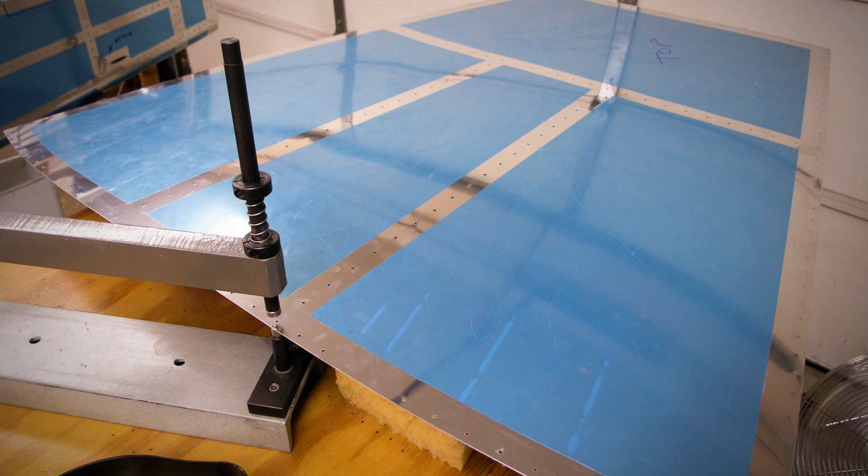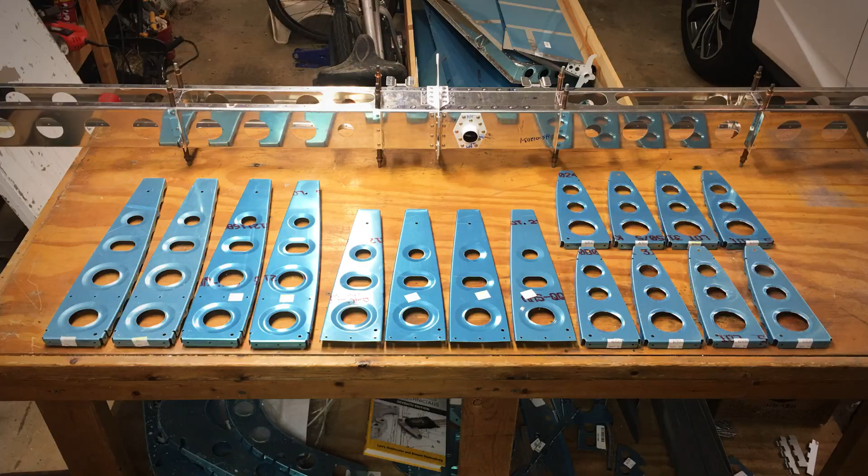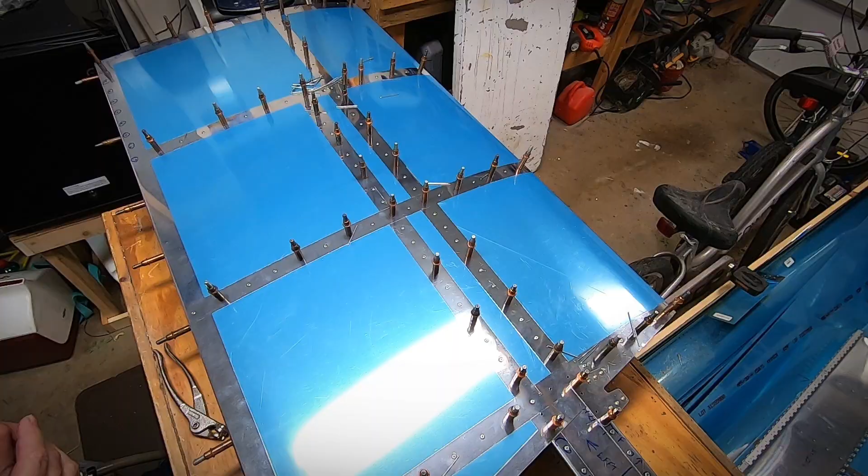Before I get into the last video in the RV-12iS Stabilator construction series, I wanted you to see something that will surely motivate you to build your own aircraft or complete the one you've already started. At McKinney High School in McKinney, Texas, there is a special group of students that are members of the McKinney Aviation Academy. This group enables students to study the history of aviation, careers in aviation, build and fly model aircraft, attend air shows, earn their student pilot license, and work on actual aircraft, discovering the many options available in the aviation industry. Here's one of their latest projects, a Vans RV-12iS.

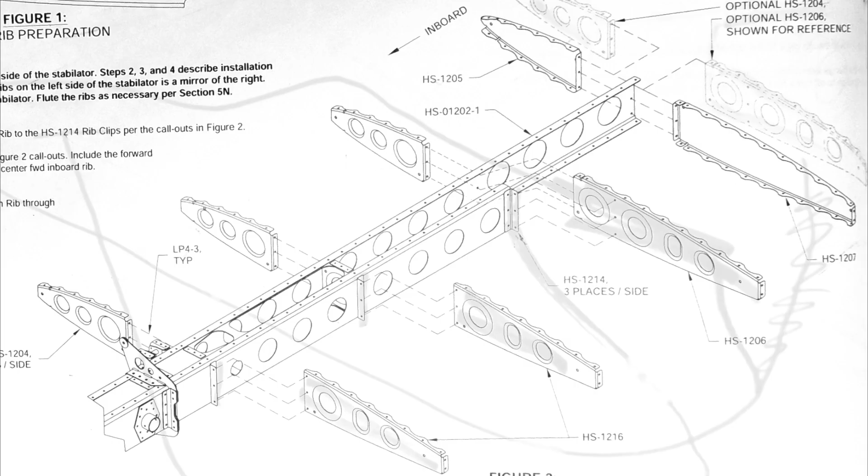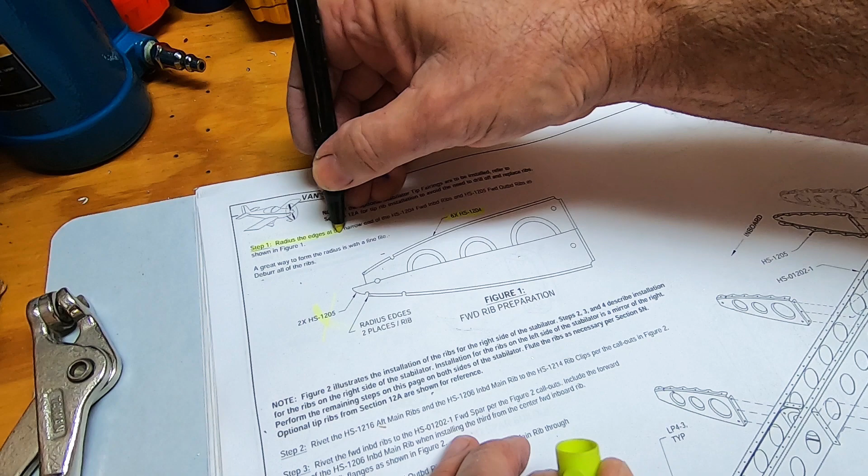Time for ribs. First thing to do is to radius the leading edges of the forward ribs. Most likely this is done to prevent the square edge of the rib from pushing too hard on the outer skin, causing an outward dent. Since this is such light material, the Scotch-Brite wheel seems to do the trick.

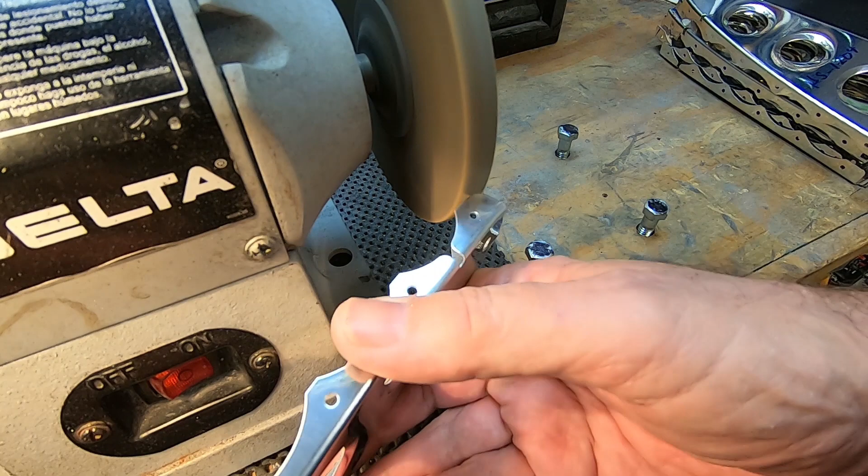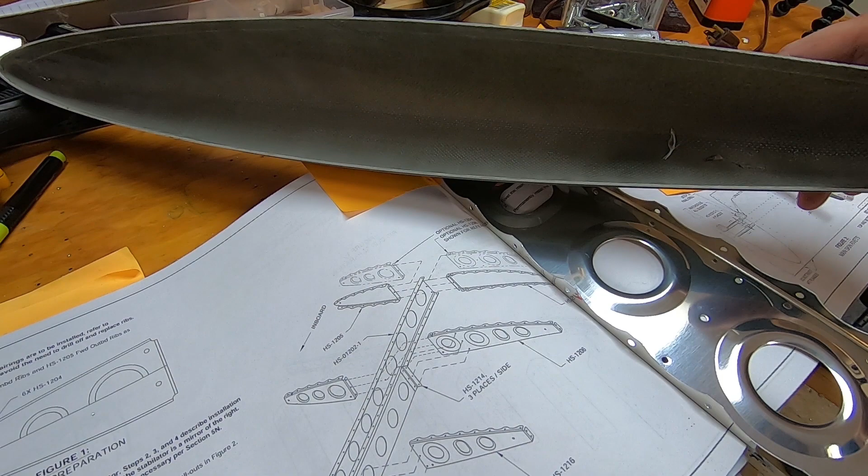All radius is done and the edges of the ribs sanded. Since I have opted to attach the optional fiberglass tips, I will need to discard the end ribs that have a solid interior and use the ribs with the lightning holes. This allows for the attachment of the fiberglass tips. When the ribs are pressed at the factory, it causes a slight warp in the rib. The fluting tool puts a small crimp in the rib edges to force the rib into a straight alignment.

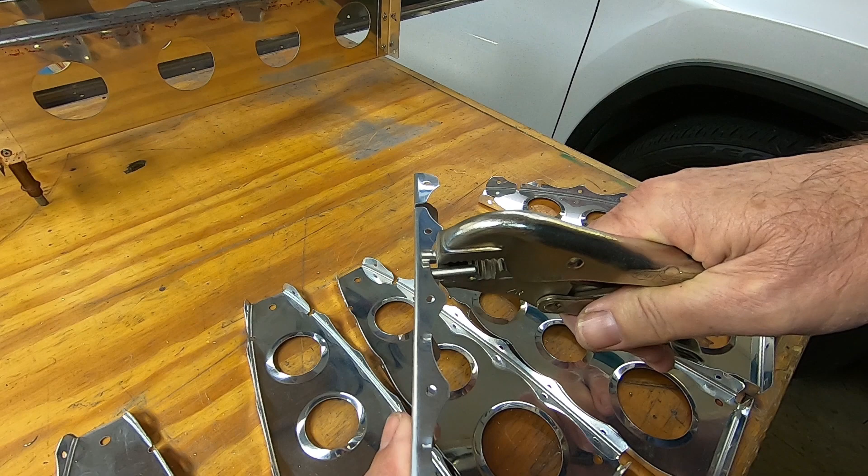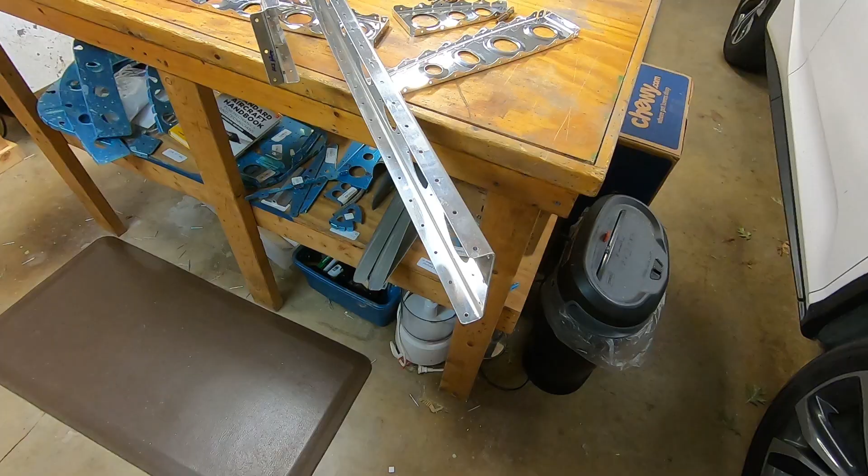Now to cleco all the ribs to the main spar.

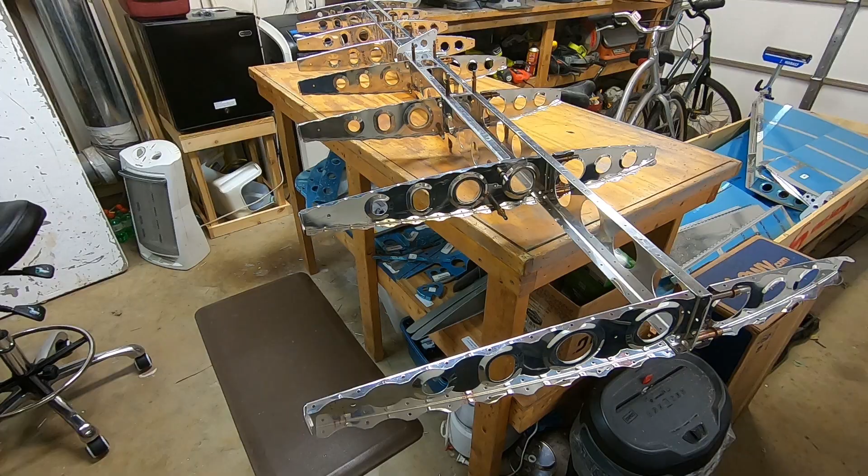All the ribs have been clecoed to the spar. Now it's time for pop riveting.

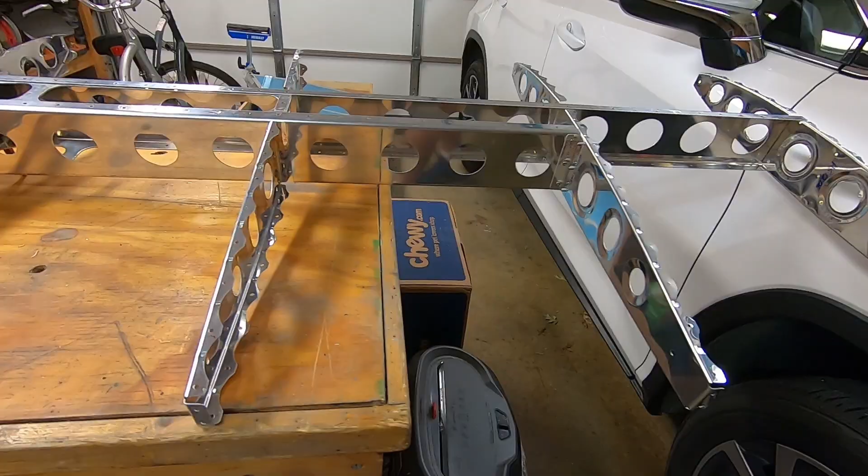There we go, all the ribs are in place. Now it's time for the skins. Okay, I've got the skins on, top and bottom.

It said to put in like 1/3 of the Clecos, which is a good thing because I ran out.

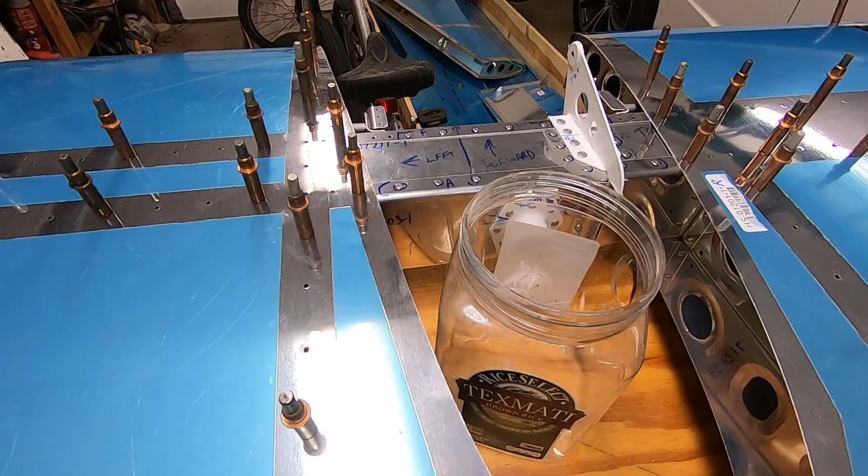Great, someone's at the door. Okay dog, I'm coming. A package from Pennsylvania.

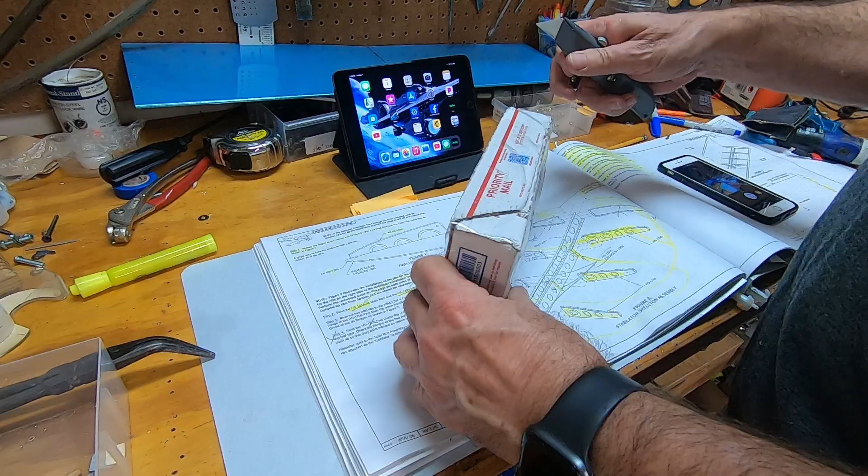Wow, somebody likes tape. Lots of tape.

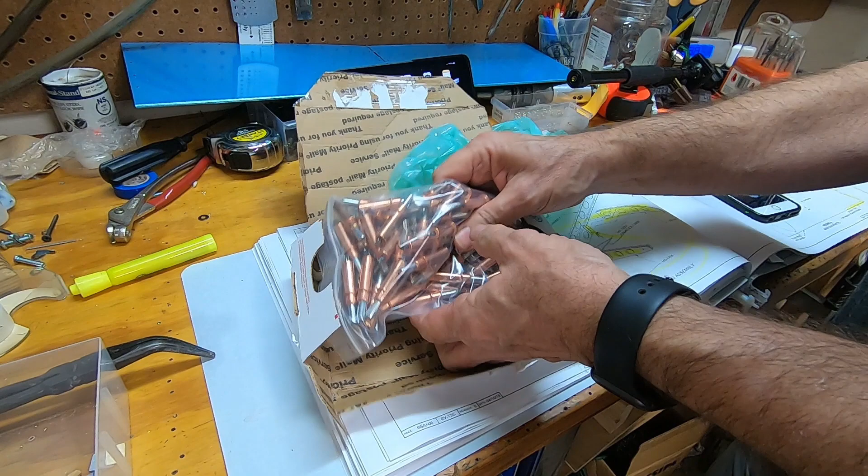Oh cool, 1/8 inch Clecos, just in time.

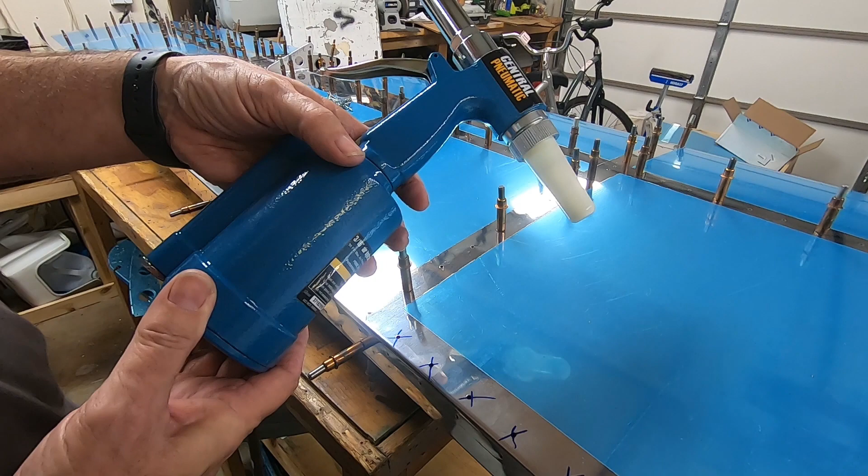Now it's time to pop rivet the top and bottom skins to the frame. This is my pop rivet gun. Got it at Harbor Freight for like $65. It's great, really works good.

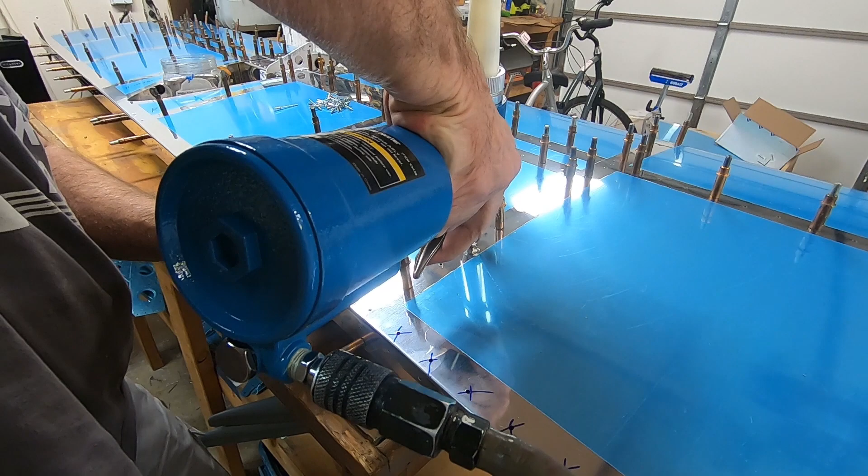The only thing I've noticed is that when you pop a rivet, the mandrel sometimes sticks. But if you take it and turn it this way, it falls through, which is pretty cool.

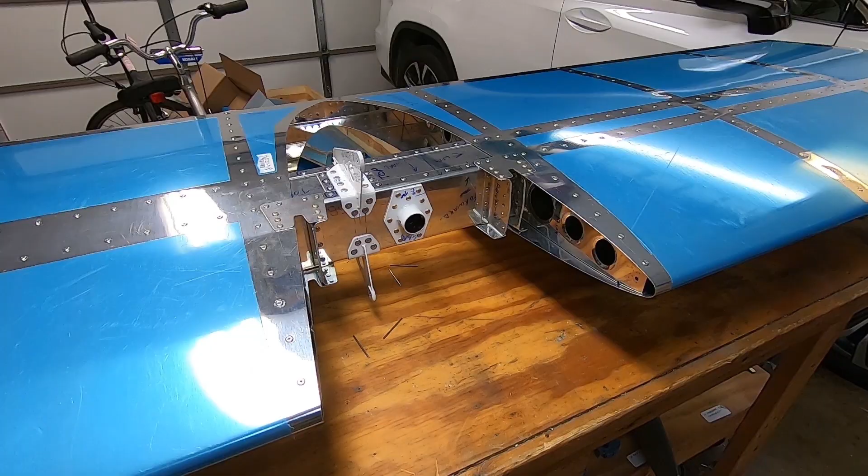I'm real proud of this. Just had to show it off.

Time for some mandrel cleanup with my handy dandy magnet.

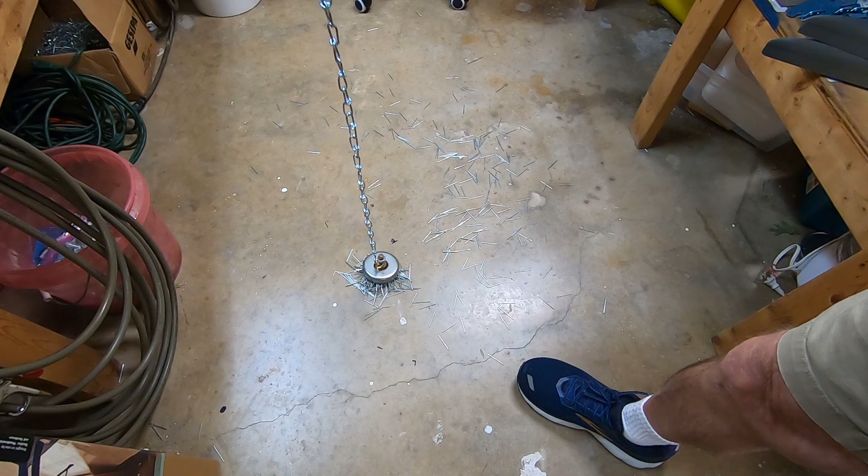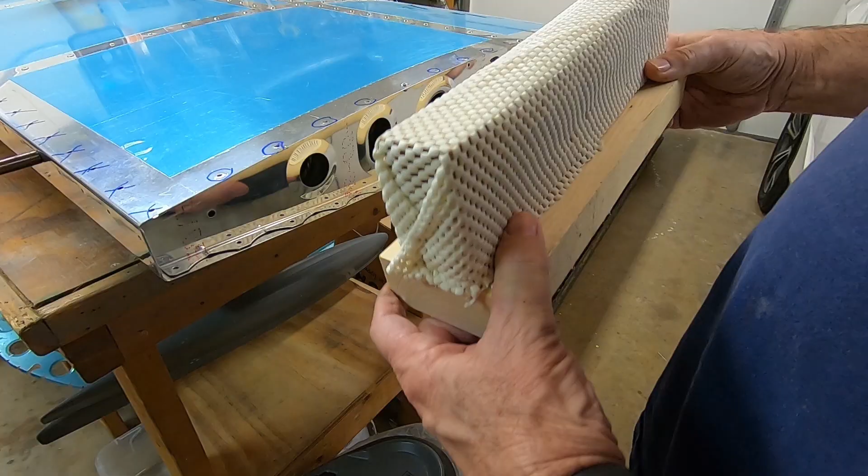I needed to lay the Stabilator flat on the workbench, so I took some 2x4s and made custom cut jigs, matching the curve of the Stabilator, then covered them with an old carpet pad. These jigs allow for the height of the upper and lower horns on the Stabilator.

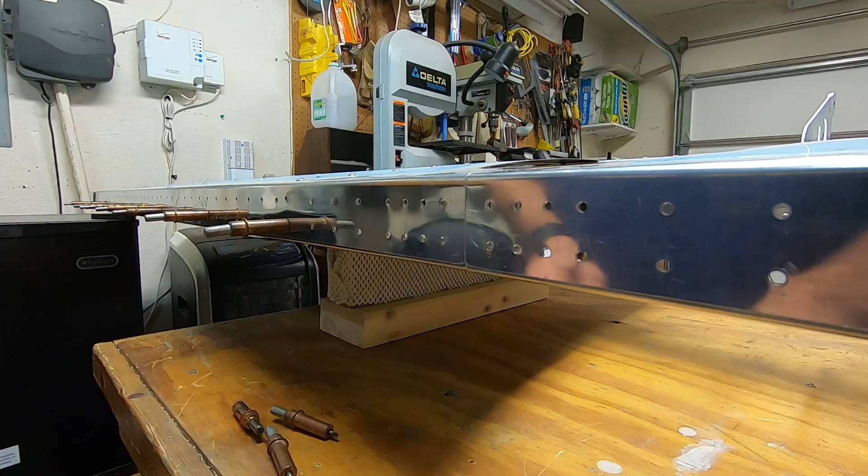This is the skin splice plate, which is used not only as a jig for the number 52 drill bit holes, but also as reinforcement for the aft hinges in a later step. I assume these holes will be used to safety wire the hinge rods in place.

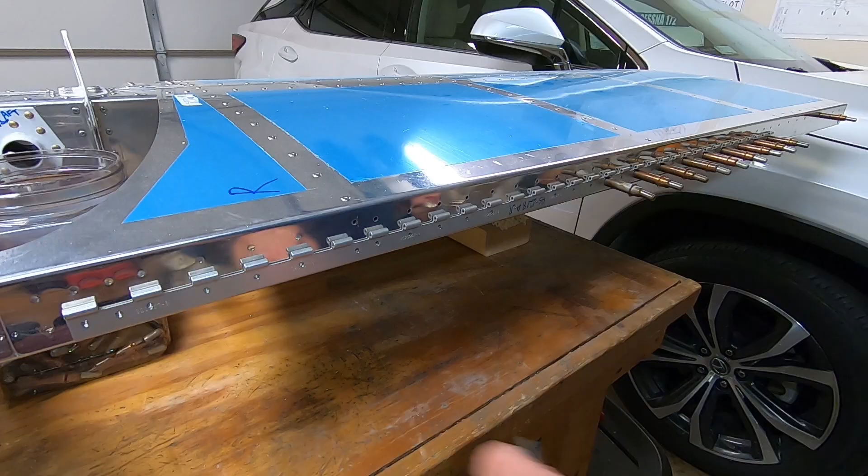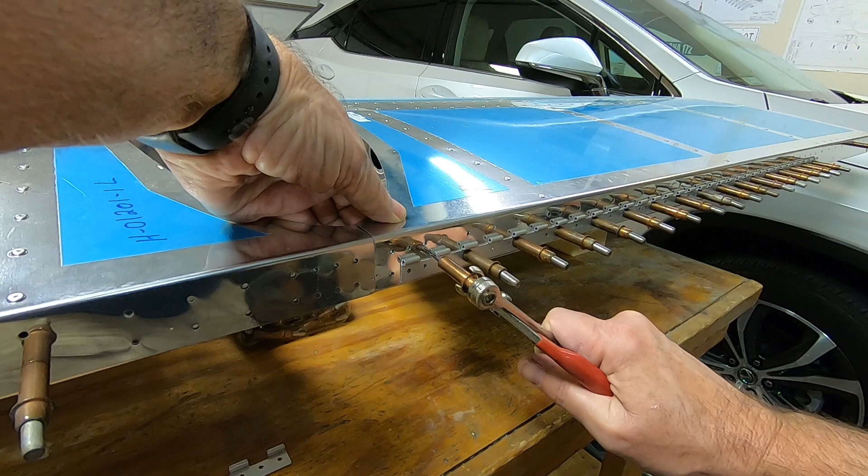Time to cleco on the aft hinges. Now for the skin splice plate. Time to pop rivet the hinges.

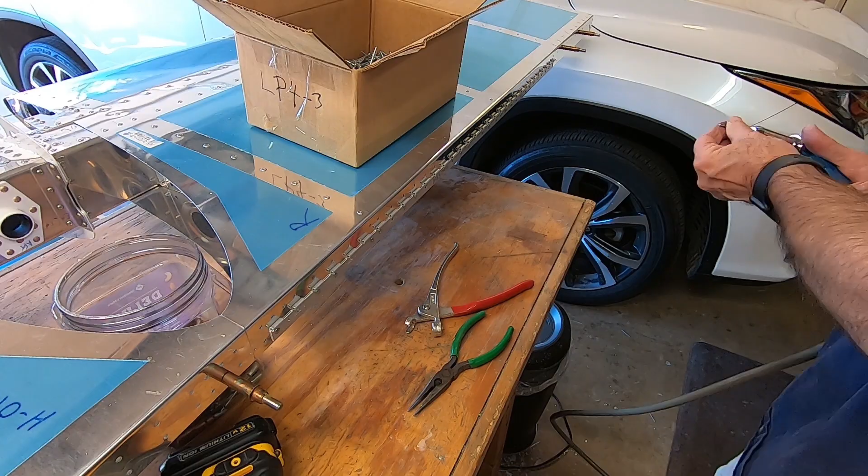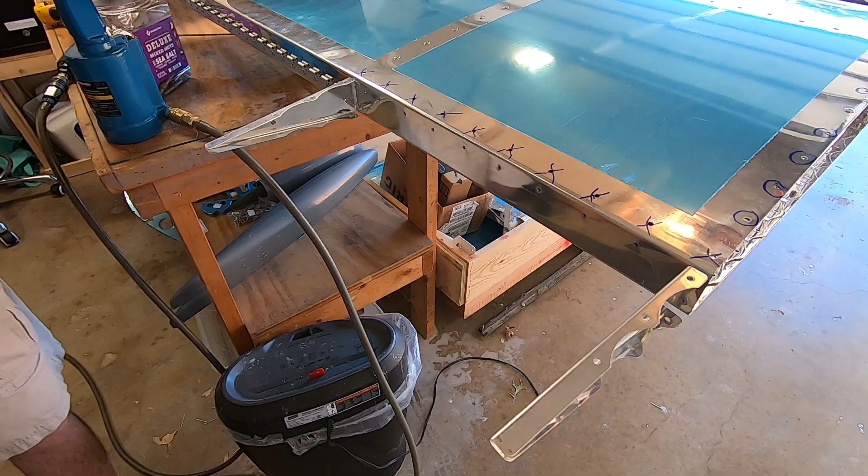Now for the aft skin and ribs. First, I need to finish pop riveting the skins. As with the other outboard ribs, the outer rib must be installed with the flanges facing outward to allow for the fiberglass tip installation.